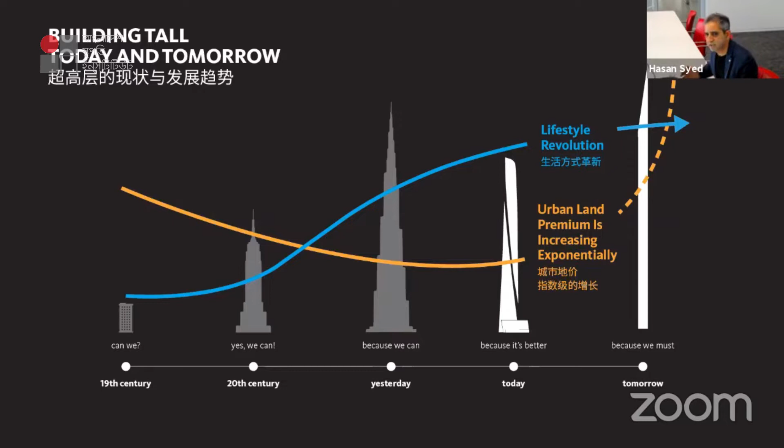It's all about two important aspects that have a direct connection to why we build tall. One is the lifestyle revolution, and one is the urban land premium increasing everywhere, especially in a lot of megacities where land is very expensive. So these two important aspects tell us there is a need for building tall.

Some of the economic drivers include, of course, prestige. It creates prestige for the city, for the district, and it spurs growth around it. We can also call it the Burj effect. If you look at the Burj Khalifa in Dubai, it may not be a very successful project financially, but I think it spurred the growth of the whole district, and all the land value around it went up. So that's what we call the prestige factor.

And of course, there's a market demand, less land, more pressure in terms of the population, urbanization. At the end of the day, the way we see designing the tall building is about creating destination. It's about bringing people together. We don't want to create a big structure which has a negative impact on the city and the surrounding.

It's all about bringing people together, creating a mix of unique experiences and adding value to the space and the sustainability. In terms of the lifestyle revolution, multi-downtown megacities are coming into existence more and more in a lot of our developing countries. There's a young workforce. They have a different way of working, and they also are dictating how the tall building would be designed, because they don't want to sit in a formal office space or live somewhere where there is no action. So instead of leaving the building, going somewhere for action, we've got to think about how we design the tall buildings where they have the action, where they are living. And of course, the consumerism is on the rise as well.

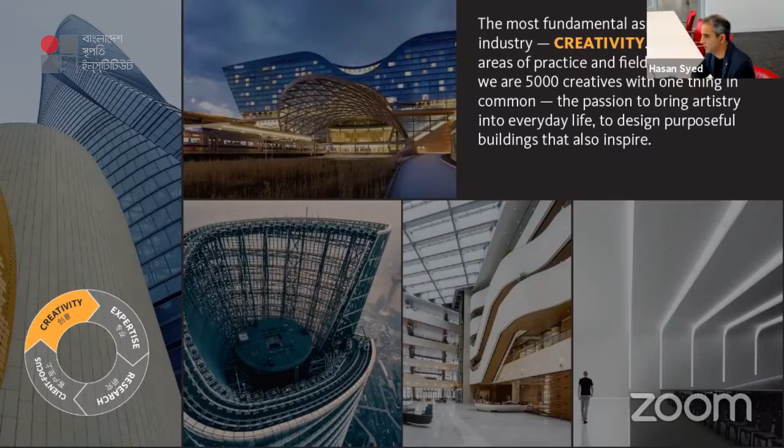When we talk about the creativity, what we are saying is that it's about artistry. It's about creating meaningful spaces. It's about creating unique experiences. It's about aesthetics, and it's about the different tools that create aesthetics. So that is a very important aspect of any project, or it's about art.

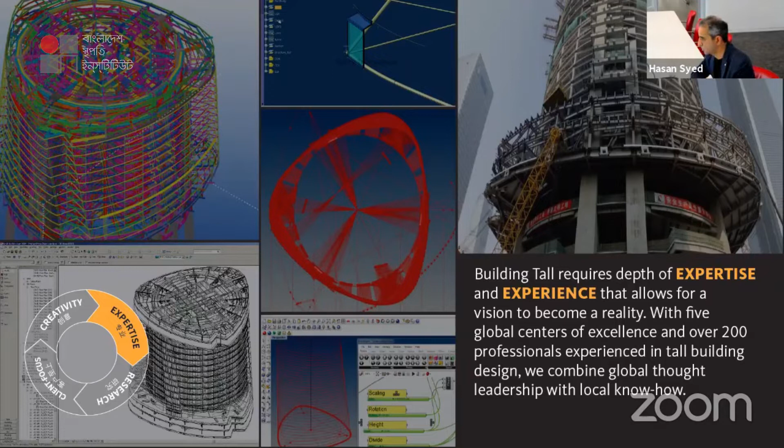And then the other important thing is that you need the right expertise to design tall buildings. In some of my previous slides, I showed you the center of excellence for our firm in 5-6 locations around the globe. We have 200 people with a lot of experience designing tall buildings. So people should know how you design tall buildings. What are the things that are needed to stabilize the tall building? How important is the structure? How important is fire life safety? How important is the impact on the neighboring communities? How important is it to connect to the city infrastructure? So the expertise and the knowledge of knowing how to realize the tall building is a very important criteria for being part of the tall building practice.

And of course, the research. In GENSLER, we have a lot of strong focus on research. We are doing a lot of research in a lot of typologies, and I think Scott touched upon it earlier, that how we are a research-focused firm. A certain percentage of our revenue goes into research. So we have different researches going on all the time, and at the moment there are a couple of researchers that have been involved as well for the tall building practice. We're looking at ways to design a digital toolkit for designing the tall building, how we can help young designers to know the basic parameters through the use of technology. So constant evolution in terms of the technology, in terms of the materiality, in terms of high-tech engineering, which is a very important component of designing tall buildings.

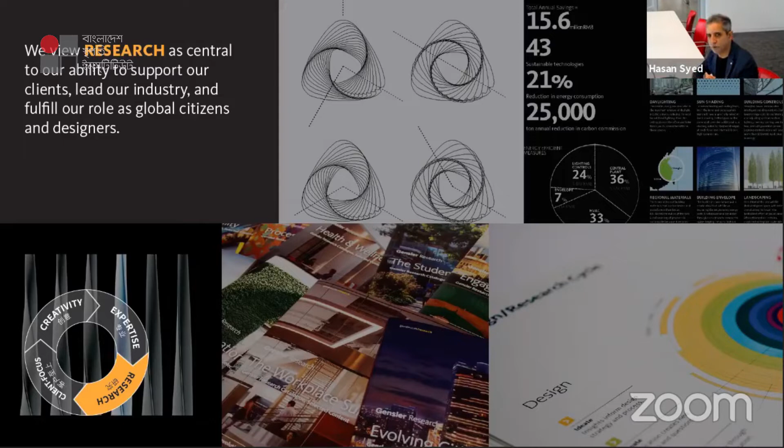It's all about understanding the need of the client. It's always a big investment. You can see a lot of tall buildings we design, not all of them go through. A lot of them during the financial crisis would suffer, be put on hold, or never be completed. So we have to be very patient, work closely, understand the amount of investment going into this product, and understand the impact this will have on the city. All these aspects are critical—working closely with the client, understanding the real purpose of why we are designing, and how we can leverage a positive impact on our communities.

Some important trends in tall building design—I'll briefly talk about these, and all these trends are part of how we designed Shanghai Tower. We're also recently working on another tall tower in Suzhou, which is 500 meters tall. All the research we do internally within our organization informs how we should approach the design of tall buildings. We have a different way of designing buildings. A lot of human-centric approach is part of the way we design, and that's what sets us apart from our competitors.

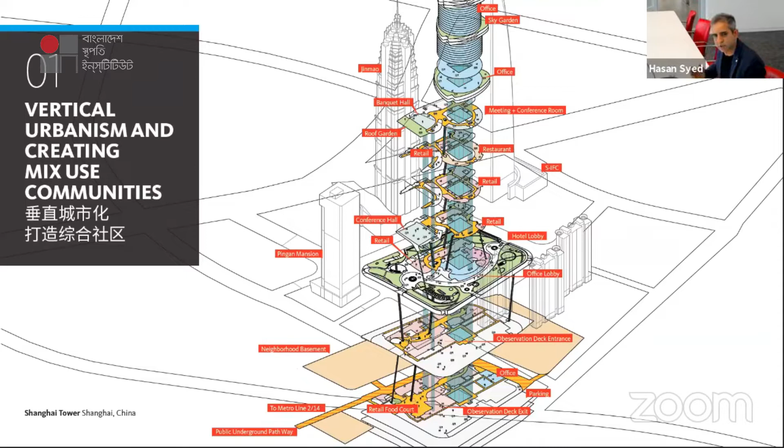One of the important trends is about vertical urbanism and creating mixed-use community. This is the diagram of the Shanghai Tower. Shanghai Tower is seen as a vertical community—you can see it's like a city. If a building is going to house 30,000 people, you can imagine it's like a small town.

You can go to some of Western Europe, the US, Canada, and Australia, and you'll see a small town of 30,000 people. Shanghai Tower will house 30,000 people. Just imagine, this is a small town, and it needs to have that vitality—it needs entertainment, amenities, spaces for people to work, to live, to get entertained. So we have to see these buildings as vertical urban communities.

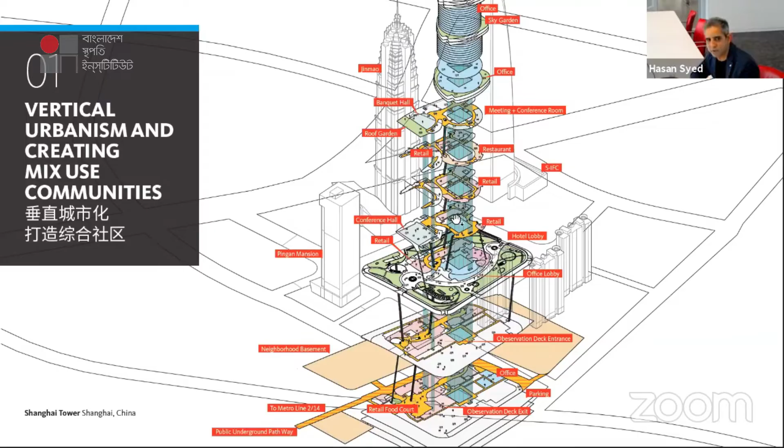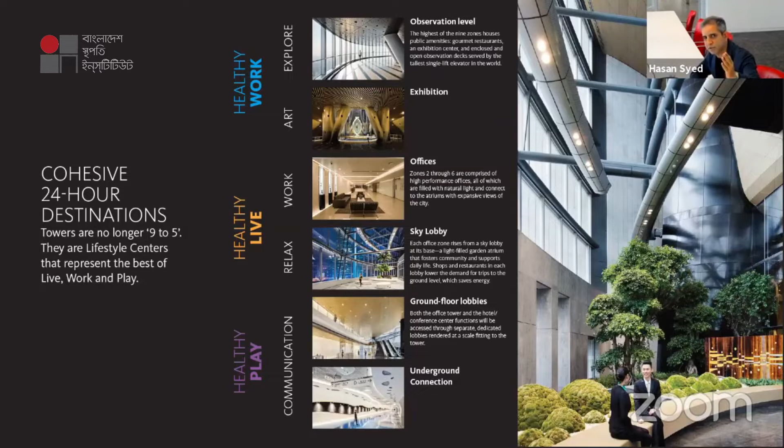This is what it's about—it has to be a 24-hour mixed-use destination. This diagram illustrates how we thought of designing tall buildings, and especially the Shanghai Tower. These are areas where people go and explore, which is the observation level.

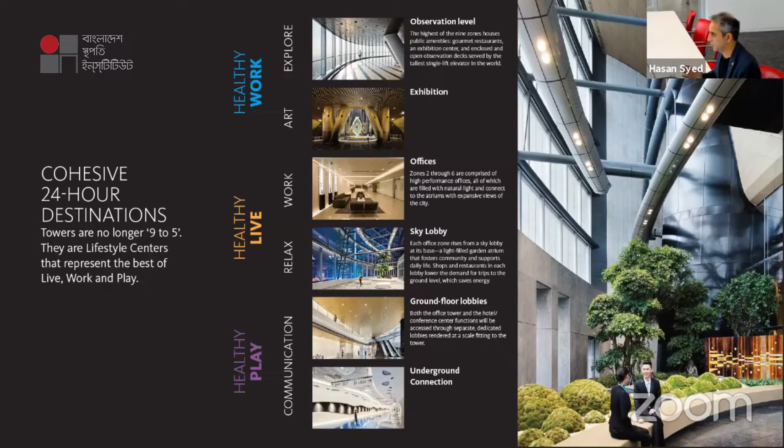There is an art aspect too. The TMD, a tuned mass damper, is an important aspect of the tall building, which keeps it stable against strong wind and typhoons. Just last week we had a typhoon in Shanghai, and you could see this whole TMD moving and stabilizing the structure to stop it from flipping over. But we use this as a piece of art, as a space, as a gallery.

And of course, the places where you're going to work—there are sky lobbies, which are the breakout spaces for the offices and the zones. There are some retails, some lobbies, some underground connections. So you can see it's a cohesive 24-hour mixed-use destination.

I'll talk a bit more later about how we see the relationship between these three tall buildings, and how it's important—as the government looked at it some 25, 30 years back—as a vision of building a cluster of three super tall buildings. Shanghai Tower is the culmination and realization of that dream the city of Shanghai had. And of course, this helps create new districts and bring vibrancy into the communities.

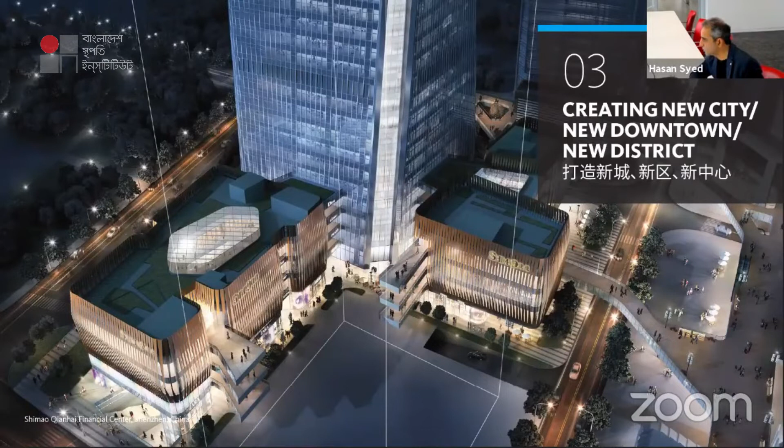The other important trend is how we can connect to the extended community—how sky bridges connect to other plots, how the underground network of metro and train and transit connects the wider city to the building, and how natural spaces within the city relate to green spaces outside. So how do we reach out to the extended community?

It's a general rule that when designing a building, we say it's enhancing the appeal of the observation deck. It's a 10% rule of thumb that can pay for the bottom 90%. It may not be true in a literal sense, but the impact of that 10% observation area is huge in terms of bringing people to the building and making it a real attractor.

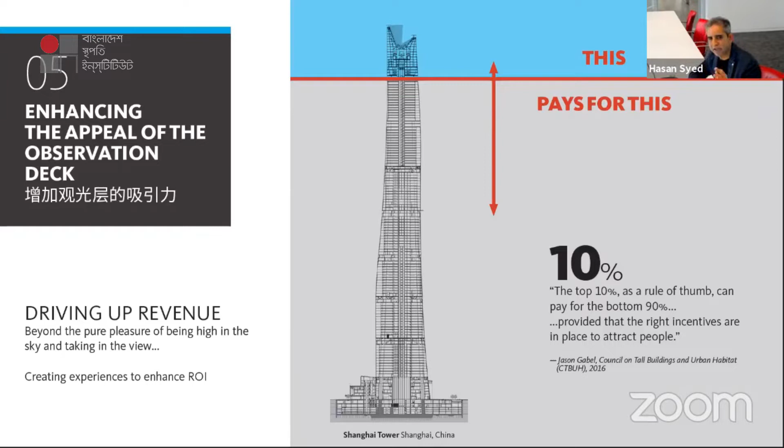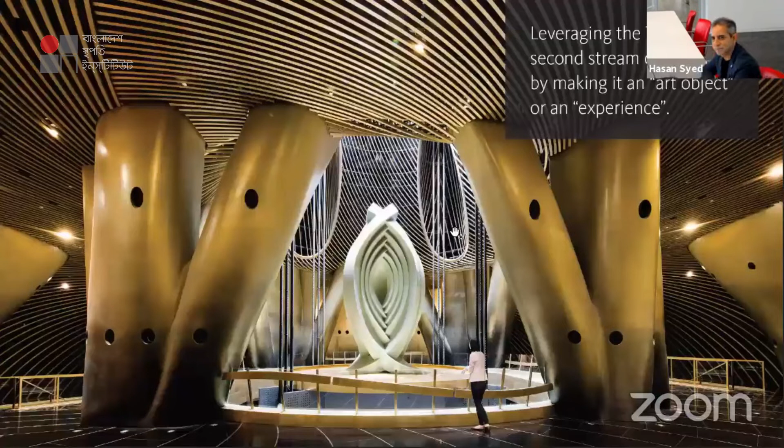And in Shanghai Tower, that has been the case. It's about bringing value to the top of the tower, having the right entertaining experience and bringing people in. And this is another thing I talked about: leveraging the TMD as a stream of revenue.

In the Shanghai Tower, the TMD shape was designed by a local artist, and it's called the Shanghai Eye. So when you say eye, it's not the eye that we see, it's the eye of the mind. This becomes a place for exhibition, a place where people go and explore. It's an artwork, and you wouldn't say it's a TMD, but yes, it's doing the job of a TMD, keeping the building honest and straight during typhoons and high winds, while creating a space for meaningful experience.

Hasan, you might explain a little more about what they're looking at there, because I think it's really interesting that the TMD is actually below the piece of art.

Yes, that's where the mass is. And the cables are really what are supporting that and creating that structural effect. Once we go to the presentation, we can touch a little more on that.

But yes, Scott, you're so right. It's like a 1,000-ton structure, and what it does is move against the movement of the sway in the building. You have the art piece sitting on top of that, and as it oscillates to keep the building straight, you see this beautiful artist's sculpture sitting there for people to walk around the gallery and see the functioning of the real engineering marvel, which is the TMD, combining art and experience together.

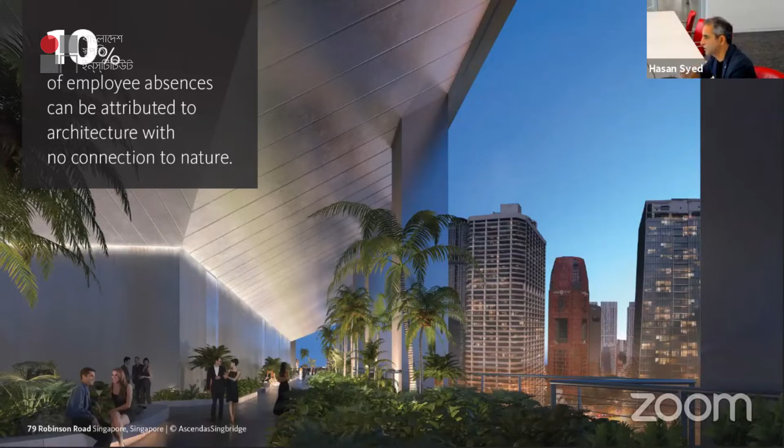As per the research we've done, we noticed that 10% of employee absences can be attributed to architecture that has no connection to nature. So it's very important to design sustainable buildings, but also very important for people to have close interaction with nature as we design buildings, both within and outside them.

One of the important aspects of designing tall buildings is understanding that safety is very critical, so evacuation is very, very critical. Fire life safety design makes or breaks the project. If the fire life safety of the project cannot be approved by the authorities, the project is not going to move forward. So it's critical that our teams work closely with local authorities, have a great understanding of local code, and bring international knowledge to create a strategy for how we're going to evacuate the building if there is a fire on the 100th floor.

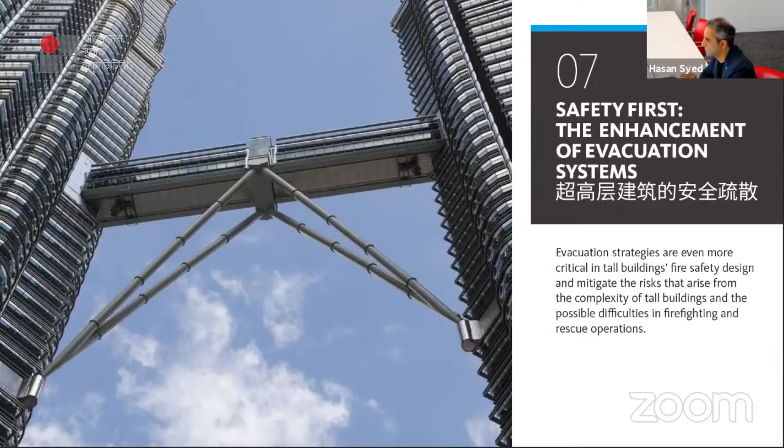Very quickly, there are two ways to handle egress. One is vertical egress, like stairs, fire elevators, and some exterior escape devices, depending on how tall the building is. Then, of course, horizontal egress components would include some refuge floors and some sky bridges.

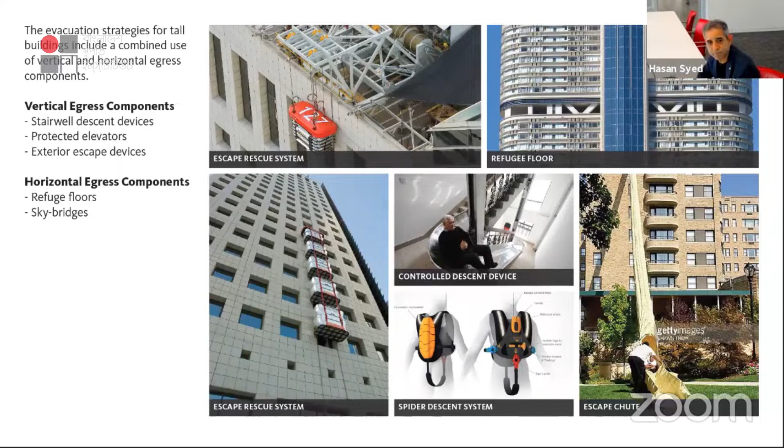And the other important critical thing about tall building design is about the impact of the advancement in the future-proofing of tall buildings. And I think vertical transportation is the key.

Vertical transportation is key because we see tall buildings like Shanghai Tower as a vertical city. It's like a city with thousands of people occupying it, and the city needs connectivity. You can't go from one place to another if you don't have roads, networks, rail, cars. You need a strong network of connectivity, and vertical transportation, the lifts, are doing the job of this.

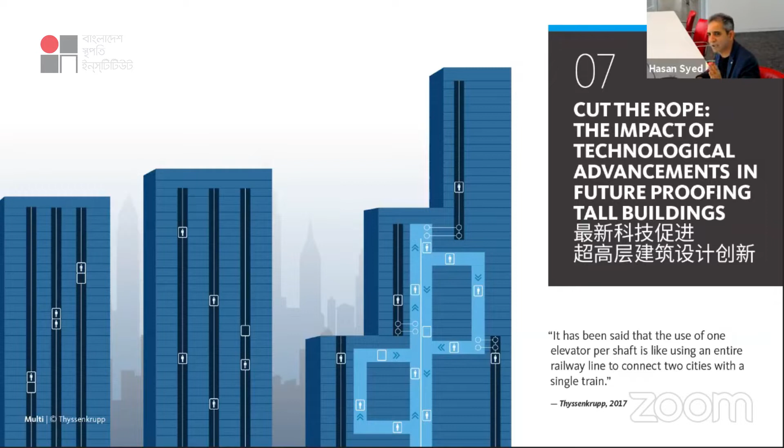I just want to read this statement: it has been said that the use of one elevator per shaft is like using an entire railway line to connect two cities with a single train. Just imagine how important this is.

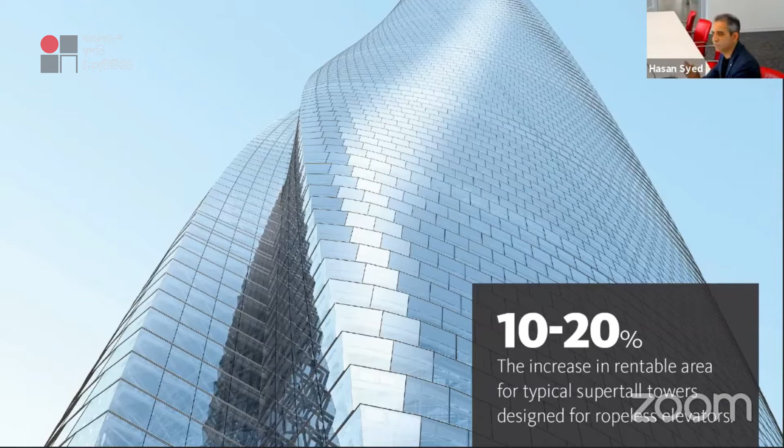If you've got a good vertical transportation system, you've got less waiting times, an efficient, fast system - a 10 to 20% increase in the rentable area for typical super tall buildings if you design them with ropeless elevators. It means it's the most efficient system, with up to 50% higher transportation capacity and reducing peak power demand by as much as 60% compared to a more conventional elevator system.

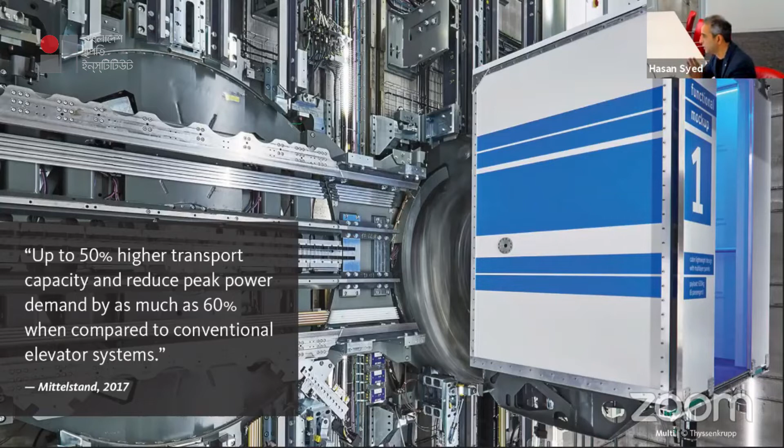So the vertical transportation system is key to designing tall buildings. That's why the core of the super tall tower is very important - it's not just a structure, but it's from where you connect to the rest of the building. We're looking at a lot of potential ways to use the transportation system. There may be opportunities to engage the buildings both horizontally and vertically. It's all about connectivity, just like roads, rail, and links.

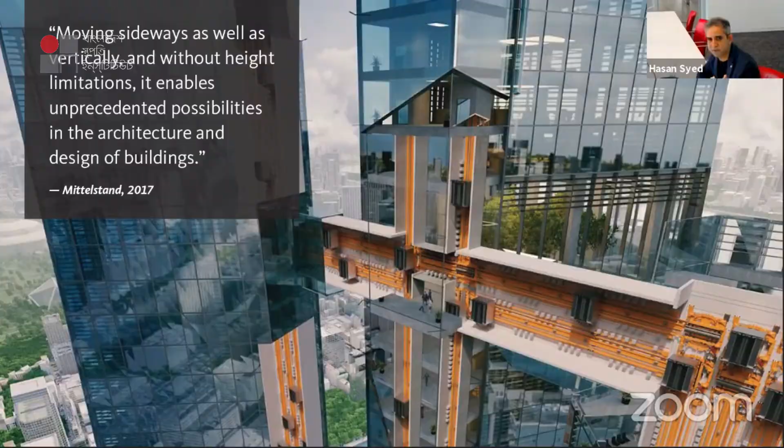So now we come to the Shanghai Tower. A lot of these trends we talked about earlier are all a precursor of what Shanghai Tower is about. They're all part of how we've designed the Shanghai Tower, looked at in reference to the scenario of the tower.

There are a few more things we want to talk about regarding Shanghai Tower. This is the as-built image overlooking the Huangpu River and Shanghai on the other side. Just a quick point on urban context: Shanghai Tower is the most forward-looking tower among the top three towers. When you look at the cluster - the Jinmao Tower, Shanghai Tower, and World Financial Center - this is the tallest cluster of super tall buildings anywhere on the planet.

Shanghai Tower is 632 meters tall. World Financial Center is about 492, close to 500 meters tall, and Jinmao is about 421 meters tall. So the tallest cluster of super tall buildings is right here.

The shape of the Jinmao Tower is like a pagoda, paying homage to the old architecture of China. World Financial Center is a straight-cut building representing the present state of modern China. And Shanghai Tower, with its boundless, infinite vertical movement and trajectory, represents the infinite growth of the city, representing the future of China. That's how we look at all three towers together, relating to the past, present, and future. It's very important to look at Shanghai Tower in the context of the other two towers.

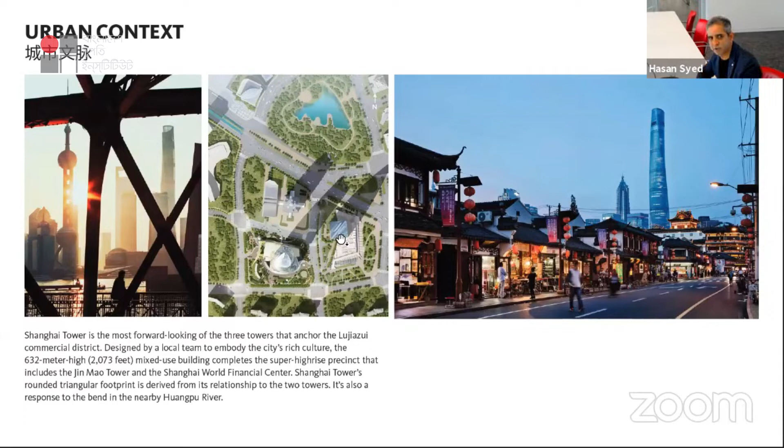The other thing I want to highlight is that if you look at the footprint of the Shanghai Tower, it's like there are two buildings - you've got a round internal tower, and then a triangular skin. That skin is the one evolving and moving as we go up, but it has a relationship to the bend of the Huangpu River. So the shape of the tower relates to its surroundings, and the context of the three buildings and how the Shanghai Tower story evolves is very critical for understanding the urban context.

And Lujiazui is a new business district, and Shanghai Tower, the tallest building there, is the 2nd tallest in the world. This shows how this whole thing has spurred growth beyond anyone could have imagined some 20, 25, 30 years back.

Vertical urbanism is very important. So we talk about the authenticity and what Shanghai is all about. The people in Shanghai love the green spaces, they love their backyard. What we've done is looked at how we can bring the Shanghainese culture of its backyard garden into the vertical urbanism. Shanghai Tower takes inspiration from a traditional, smaller scale courtyard neighborhood parks and recasts them in a more vertical way. You see the tower embracing this idea, and then you have those vertical gardens and parks going all the way right to the top. So it's embedded strongly into what Shanghai is about.

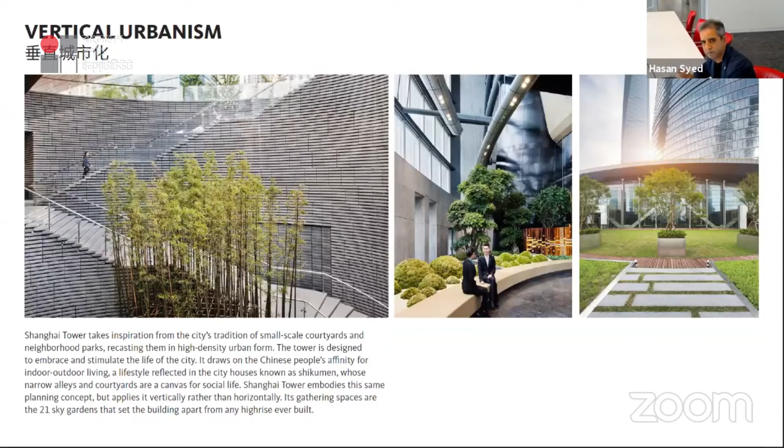The other thing we want to talk about is form and function. A lot of people think, oh okay, it's an architect's ego, we want a nice twisting form that looks cool. No, that is not the way we design buildings. Everything is informed through the story we created in terms of what Shanghai is about, how we can bring Shanghai courtyard, backyard, green spaces into the building. And then we look at this building.

A super tall building has a serious impact from strong winds. We recently had a typhoon. We talked about the TMD, how it oscillates and keeps the building upright and stable at the top. So wind is one of the most important considerations when designing the structure and shape of the tall building. We tested in a big lab, with a 12 meters tall tower model, to look at what is the best angle and degree of twist that would minimize the wind impact on the building.

When you reduce the wind impact on the building, the building becomes lighter, the structure becomes lighter. In that way we saved $58 million in cost, mostly in terms of material, because of the shape that reduces the wind. A 120-degree twist, we felt, was the best degree to achieve that result. So everything is informed by logic, science. It's not just the ego of designers to create a certain shape, we are not into that. We create meaningful aesthetics and architecture based on research and engineering. That is the best solution.

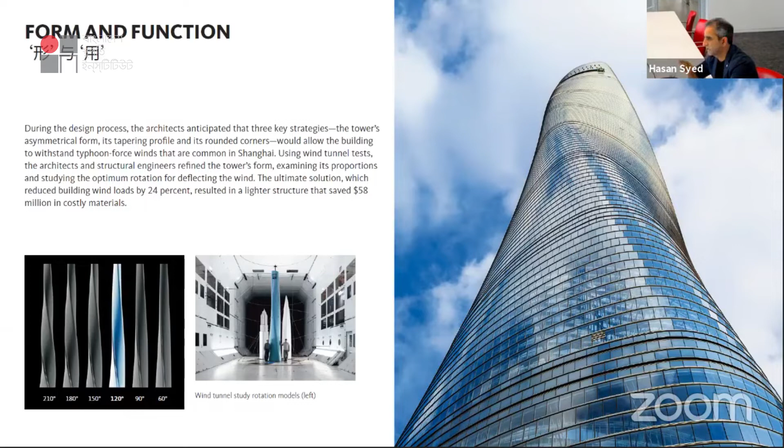Just to have a little understanding of how the tall building structure works: of course you have the main structure, so your core is your main structure. Then you have super columns, and the super columns are connected by outriggers, where you have mechanical floors and refuge floors at every zone that brace it back. This forms the core structure of the tower.

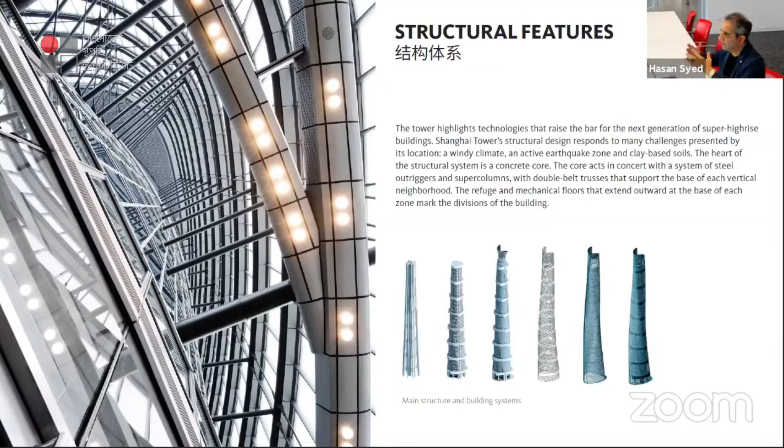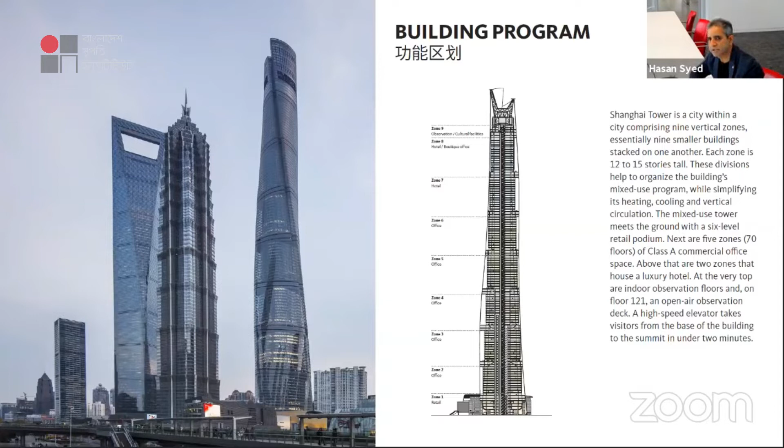And of course then you have the outer skin. In the case of Shanghai Tower, we have those zones extended out, and that's how we form the vertical lobbies and atriums around the tower as the green spaces. So this is the general programming of the tower. You've got a TMD and the exit space at the top, observation spaces. Just recently they've opened the Hotel J, one of the top boutique hotels in China. There's a hotel, there's another hotel, offices, retail, conference hall, meeting places, and a whole heap of connections to the underground metro system. So that's how we see this as a vertical city.

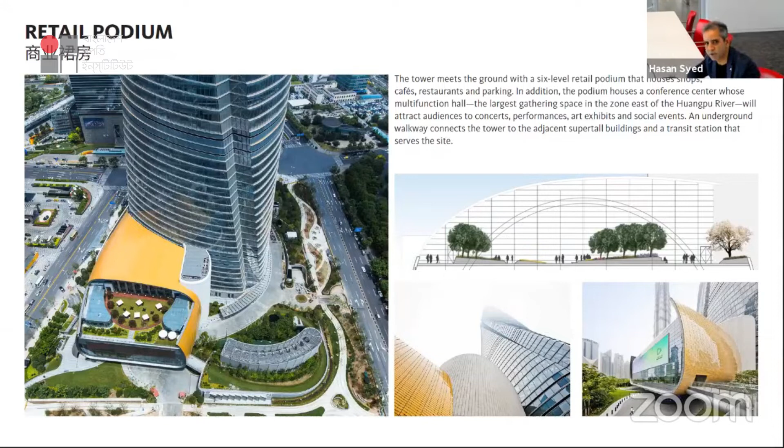Just to show you a bit about the programming, the roof of the podium also gives you an opportunity as a breakout space to go out, and you have a garden space at the top of the podium too. And the concept of the sky garden has two important things: one is the outer skin, and one is the inner skin, which is circular. These two wall systems are created as a one-of-a-kind sky garden. There are 21 sky gardens in the building, and all of these atria are your backyard green spaces, your neighborhood parks. It's also a very sustainable thing to do.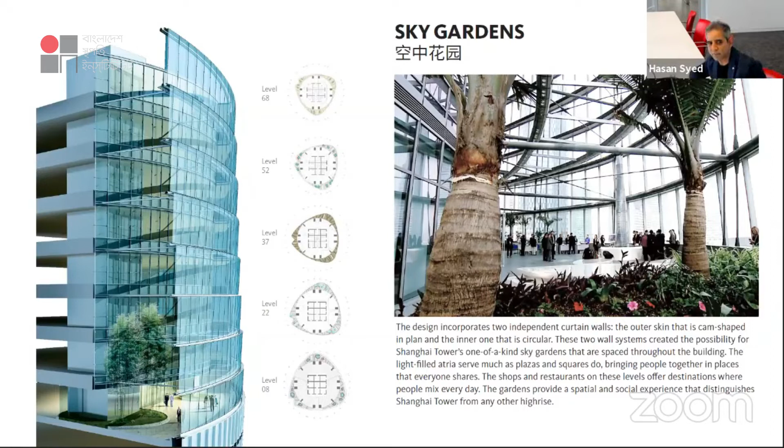You can see these atriums rotating around the building, and they go the full height of the zone, about 50 meters. And of course, commercial office spaces, hotels, underground connectivity, and the observation level.

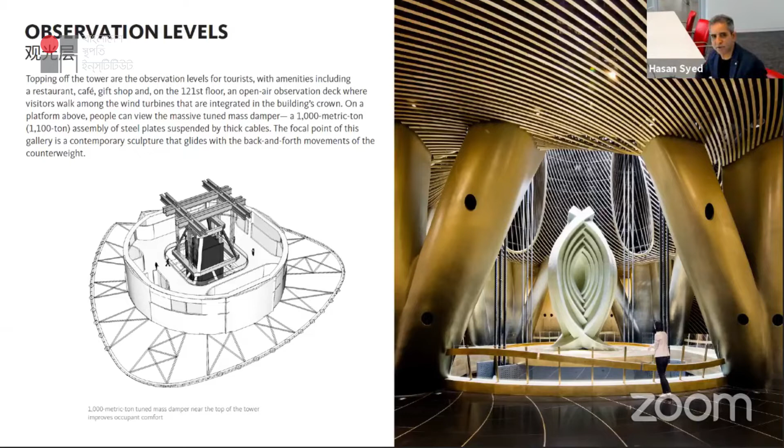You can see the topping of the tower is for the observation level for tourists. Then you have amenities—restaurants, cafes, gift shops—and an open air observation deck where you can walk around. On a platform above, people can view, as we talked about earlier, the 1,000 metric ton assembly of a steel plate suspended by thick cables. You can see the thick cables suspending the 1,000 metric ton TMD, and there's a sculpture on top of that, which becomes a focal point of this whole gallery. This whole area around it is a gallery, and this TMD, which moves back and forth, acts like a counterweight to the strong wind at the top.

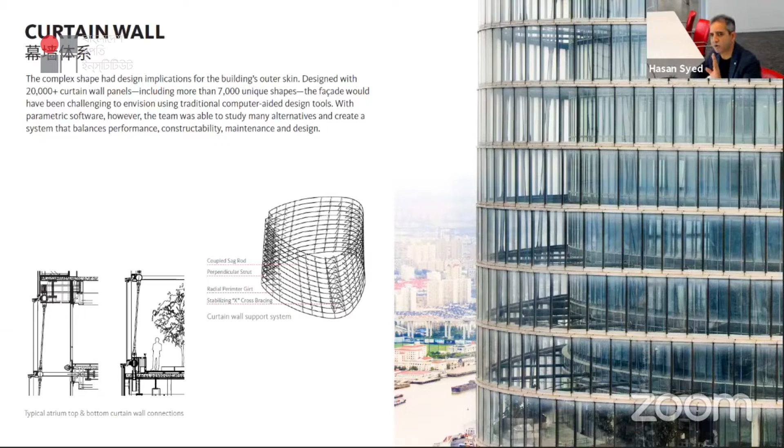And of course the curtain wall was a complex shape design, so we had to work with 20,000 curtain wall panels, including more than 7,000 unique shapes. The facade would have been challenging, but we used the BIM system to work out the geometry, and each and every panel was factory made and installed on site.

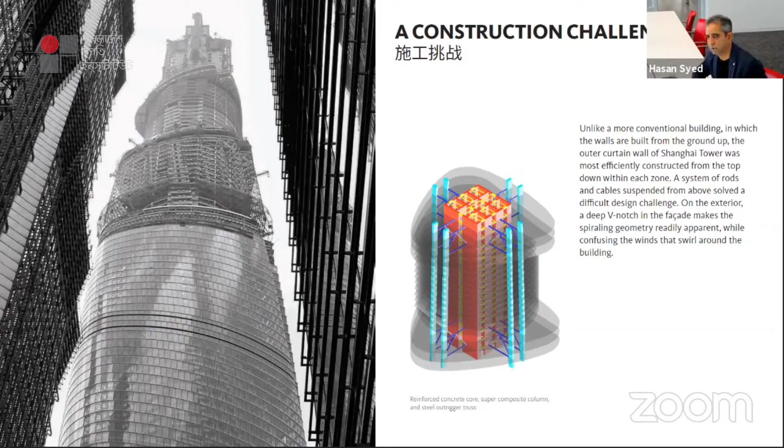And of course, the construction challenge—we talked about the structure. I wanted to show you the reinforced concrete core, and you've got super composite columns, shown in blue. Then of course you've got steel outrigger trusses—can you see the dark blue ones—which at every refuge floor go back and brace to the core. That forms the core structure in most of the super tall buildings.

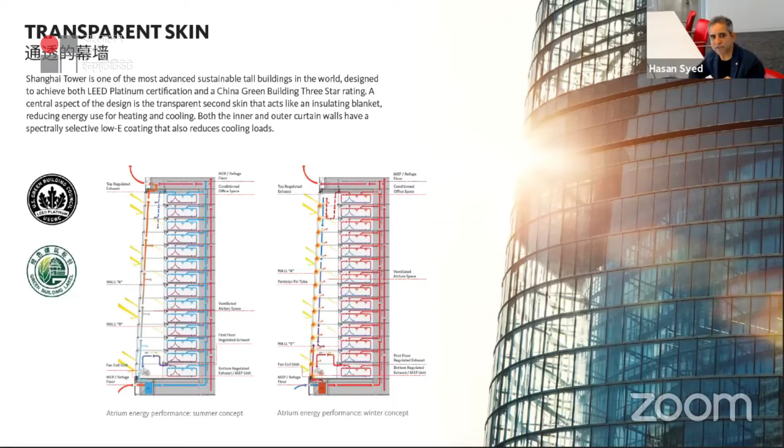And of course, the transparent skin. We are very proud to say that Shanghai Tower is one of the most advanced sustainable tall buildings in the world, having achieved LEED Platinum certification as well as the China Green Building 3-star rating. That is one of the important aspects of this whole tower—the most sustainable super tall building anywhere on the planet.

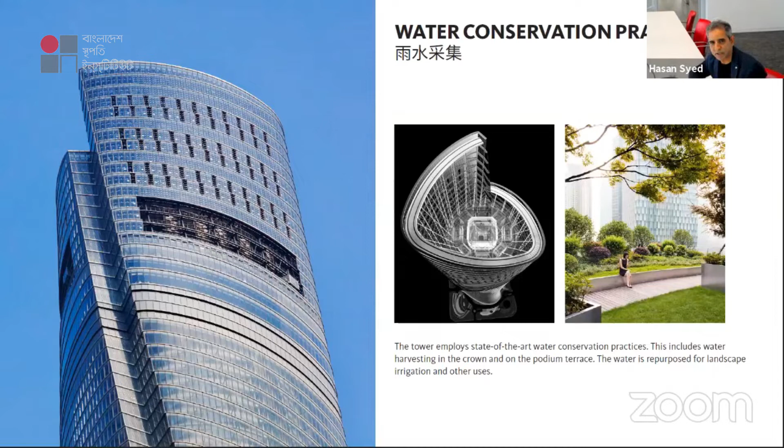And of course we've got strategies of water conservation at the top, and the water is used for the green spaces we have on the landscaping and the roof. And of course we've got wind turbines at the top as well. So we talked about a lot of sustainable strategies.

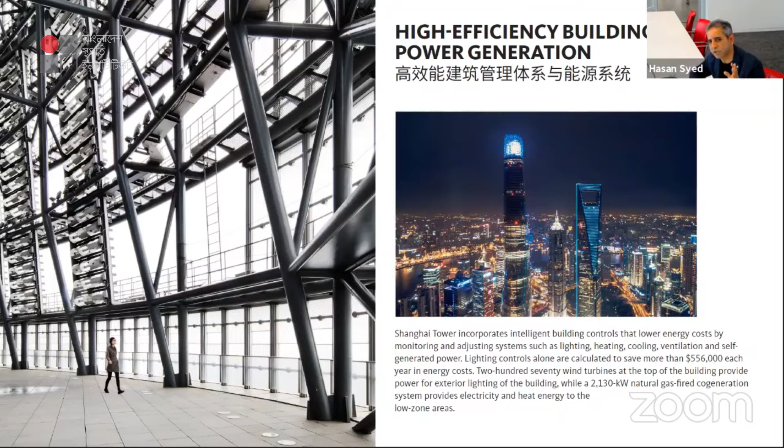You see the picture on the left—it incorporates intelligent building controls that lower energy costs by monitoring and adjusting systems such as lighting, heating, cooling, and ventilation, and self-generates power. The lighting controls alone are calculated to save more than $556,000 each year in energy costs. 270 wind turbines at the top of the building provide power for exterior lighting. The 2,130 kilowatt natural gas-fired cogeneration system provides electricity and heat energy to the low zone area. So all of this makes it the most sustainable super tall tower.